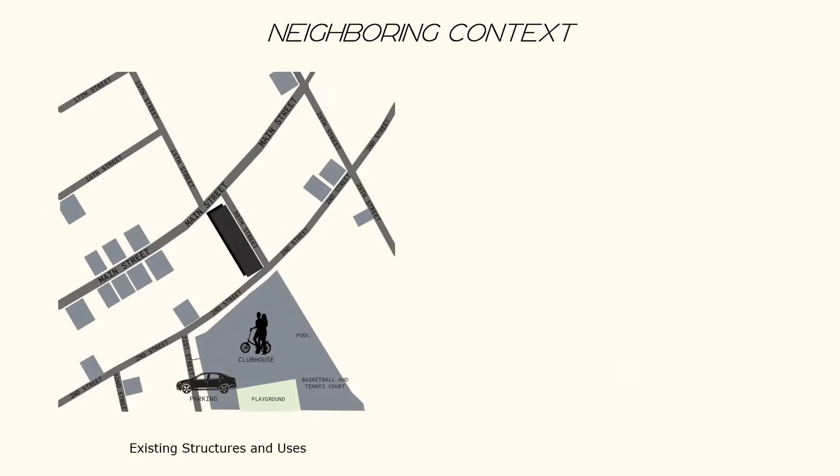Here is the village map showing the site of the program. Neighboring context: there are existing structures beside the site, which are the neighbors' houses, and at its right, the clubhouse, where there is a pool, basketball and tennis court, parking, and a playground.

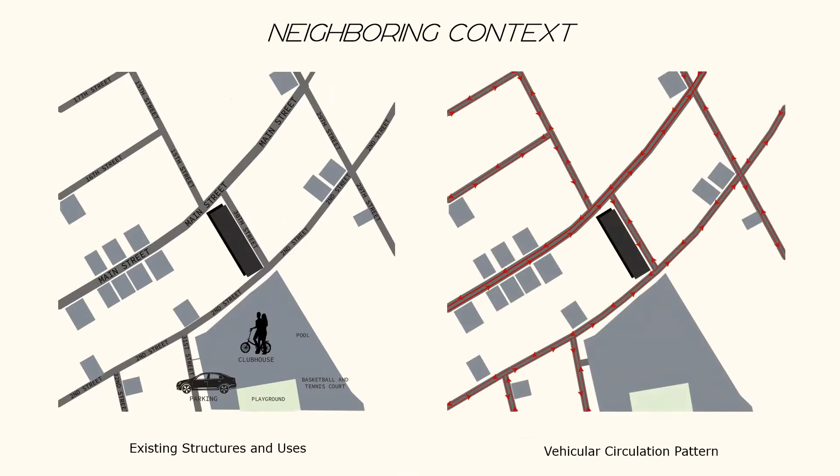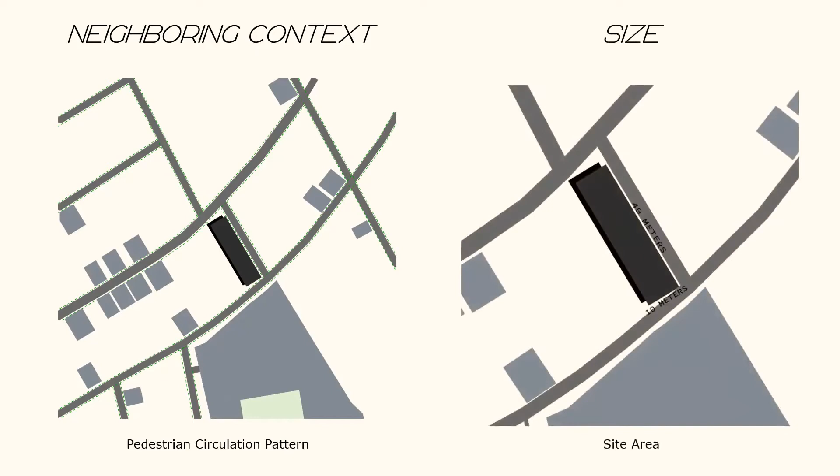The vehicular circulation pattern of the site is that all sides are accessible to cars and bikes. The pedestrian circulation pattern around the site is the same as vehicles, and pedestrians can easily access or go in and out of the site with no problem. The next parameter is the size of the site, which is 40 meters by 10 meters, or 400 square meters.

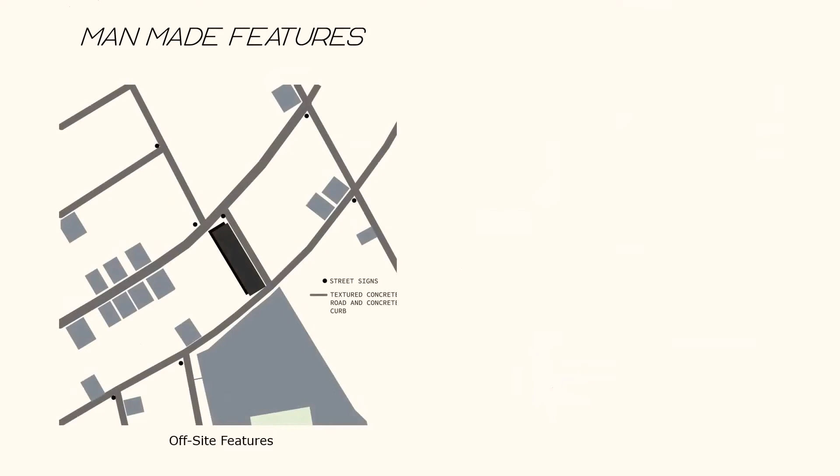The man-made features of the site are the street signs almost at every corner, the textured concrete roads, and the concrete curbs. The natural features, specifically the vegetation, include trees around the site, but they don't disturb the actual site. The place is surrounded by grasslands as the village is not yet occupied by many houses.

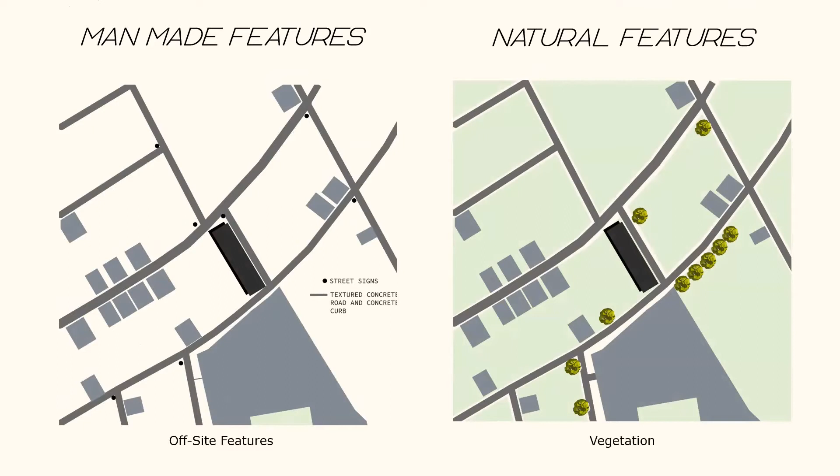Next is the temperature at the site. The average low temperature is 22.8 degrees Celsius, and the average high temperature is 30 degrees Celsius. The humidity at the site is also considered, and its average relative humidity is 80%.

The last climate parameter is the rainfall amount in millimeters. The average amount of rainfall in a year at the site is 1,950 millimeters, and September is the month with the most rainfall.

The next parameter is sensory. From the site, the negative views are when facing the clubhouse and looking directly at the neighbor's house. The positive views are at the right, with less housing and more greenery. The view of the main site has the most appealing view of passing vehicles.

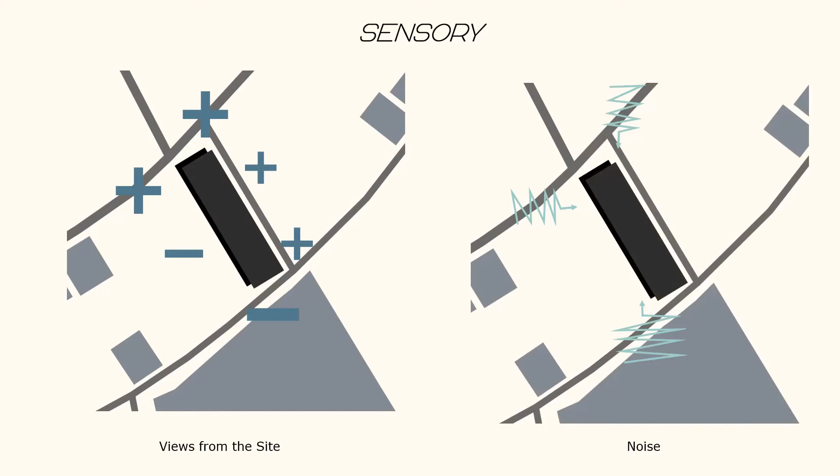The noise around the site will come from the clubhouse, which involves many activities. It will be noisiest during events at the clubhouse and in the afternoon when children are playing. Other noises from cars will be heard too, specifically loud motorcycles and small racing cars. Lastly, airborne pollutants will come from the main street, from the smoke of passing vehicles.

Socio-cultural parameters: Santa Rosa City has 18 barangays with a total population of 296,621 as of 2013. Barangay Dila has 9.5%, or 28,195, of Santa Rosa's population.

The sex ratio of Barangay Dila is 50.40% female to 49.60% male. The top age group in the barangay is 20 to 29 years old, at 26.35% of the population. This age group is most probably college students and mostly working.

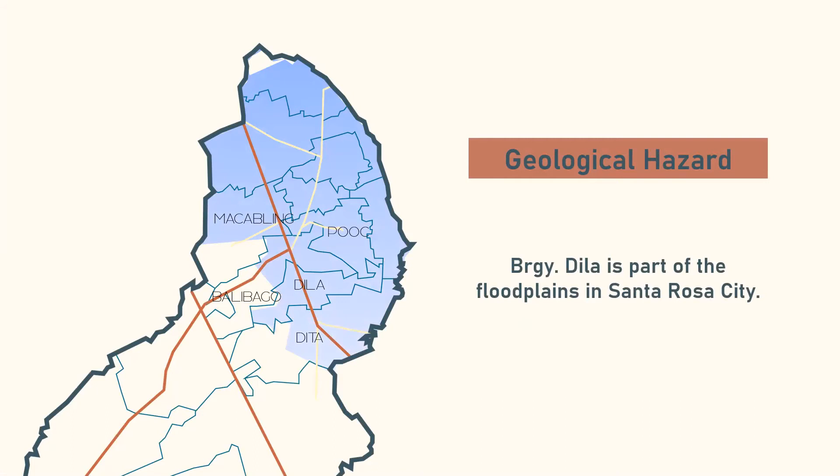A geological hazard in Santa Rosa is its floodplains, and Barangay Dila is part of it, along with Macabling, Pooc, parts of Balibago and Dita, and other barangays at the upper part of the city.

The goal and objectives: the goal is to have a safe and creative space for young adults to work individually while being in the community. The objectives are to create a space for individuals to get energized and stimulate their motivation, and to create a common space for individuals and groups to work on a project.

As the top age group in Barangay Dila is 20 to 29 years old, I considered creating a co-working space for them, especially since today everyone is situated at home to work and study. I created this to have a separate space for work or study in the meantime.

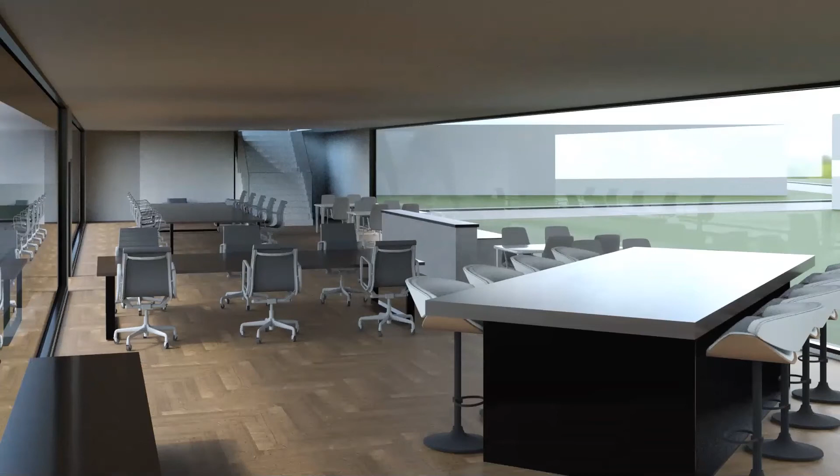So the programs are: at the first floor, there is a small kitchen and pantry, dining table, reception, office desk, and more desks, and comfort rooms for both female and male.

Another perspective of the first floor shows an open area for when you don't want to work at a desk anymore, then the stairs, the desk, reception, and dining area at the opposite side.

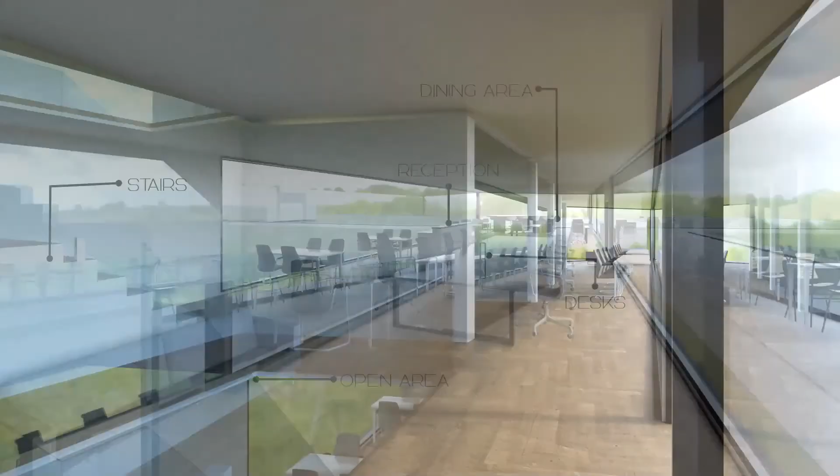Going up, you'll see a desk, 4 meeting rooms, computer desks, another open area which is bigger than the first floor, and a veranda, a space for when you need air.

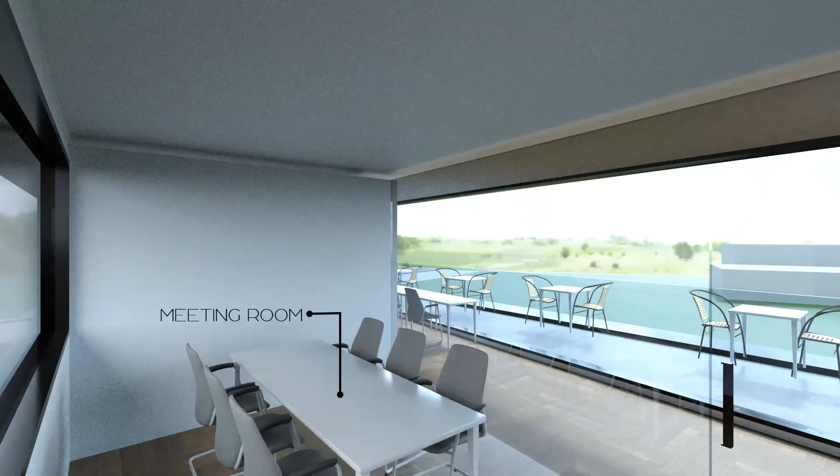The view from the meeting room can accommodate at least 6 people, and then there are computer desks and the veranda you'll see from the meeting room.

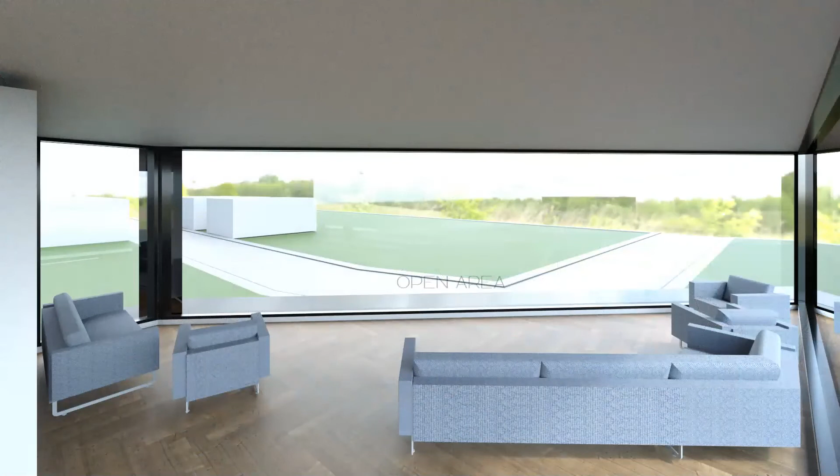And then a closer look at the open area on the second floor.

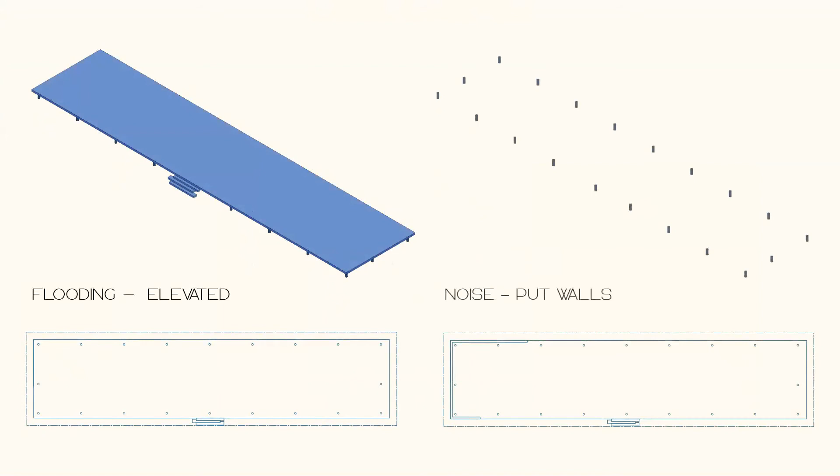Diagrams: the first thing I did was elevate the building because the site was part of the city's floodplains. Next, I put up walls at the left side of the structure to prevent noise from the clubhouse coming in.

Because the best views are at the right side, I put glass panels instead of walls to let the views of greenery in.

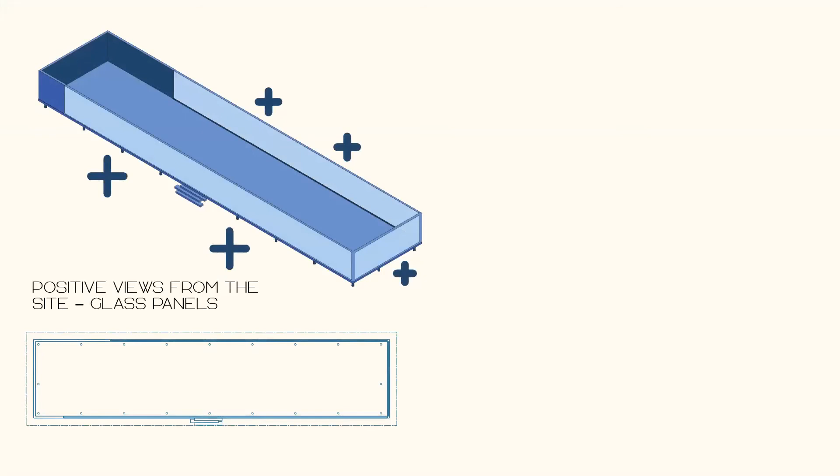To add more, because of the views, the structure is cut diagonally to see the west view, or the sunset view. This diagonal cut would also prevent the noon sunlight from entering the building directly.

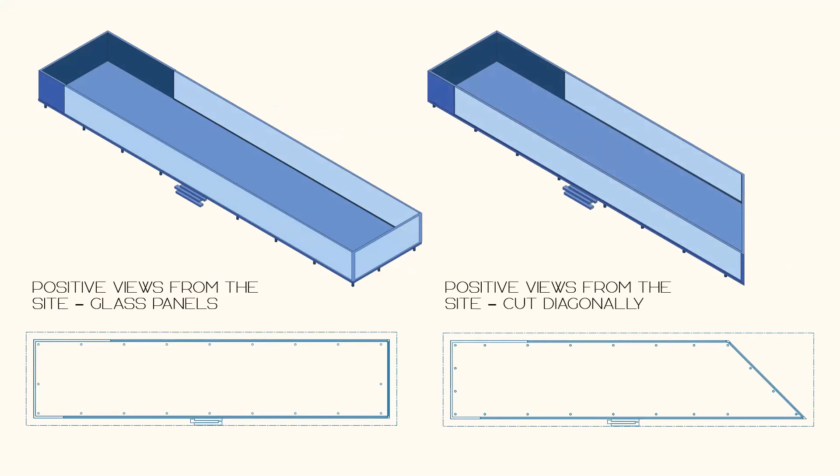Then, a second floor was added to provide more space.

Next, because of the wind direction, northeast to southwest, a veranda was added so users could go there with the breeze. This side also faces east, so the morning sunlight is what hits the veranda, so it doesn't get too hot at noon.

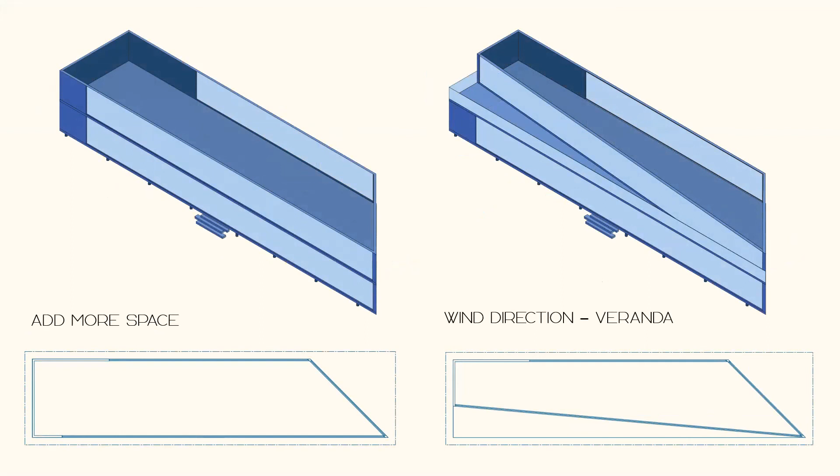Because of the climate, a large amount of rainfall falls, so eaves are added, which also protect from too much heat from the sun. This is how the shape of the structure looks, from the ground floor to the roof.

The design process of the co-working space started from its macro-site analysis to its micro-site analysis, studying Santa Rosa City generally down to Barangay Dila specifically. The physical parameters and socio-cultural parameters were researched and applied, along with the goal and objectives for the community.